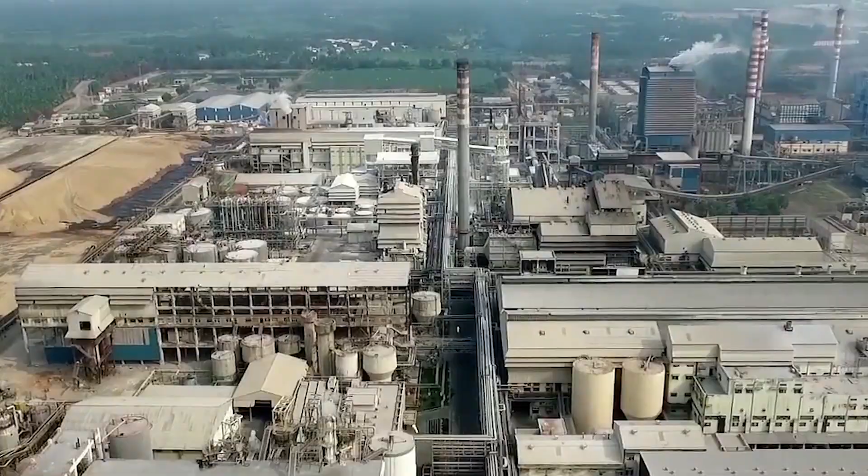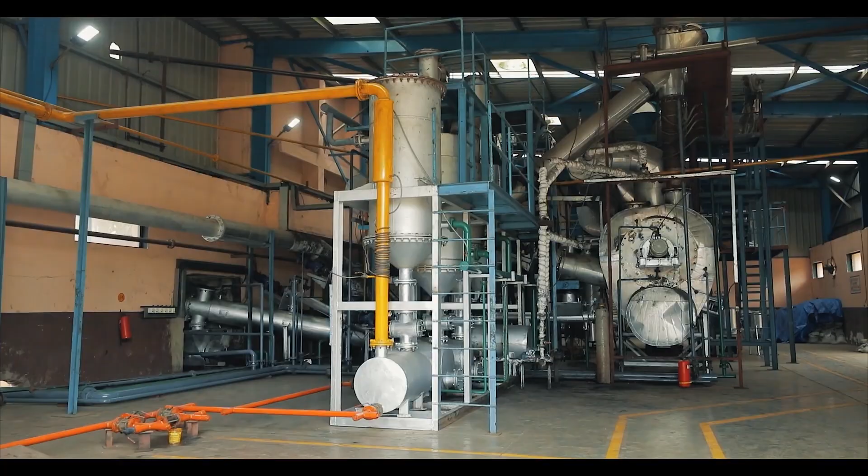Agan Pyrolysis plant, a next-generation technology that converts plastic into valuable fuel. From 5 tons of plastic, we produce 2.5 tons of pure pyrolysis oil. No smoke, no residue. Waste becomes wealth. This is not just recycling. This is a global-grade fuel reshaping the energy market.

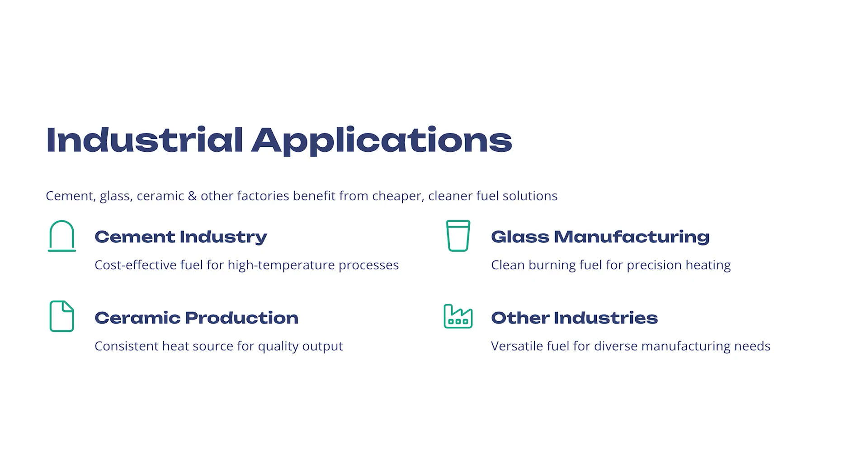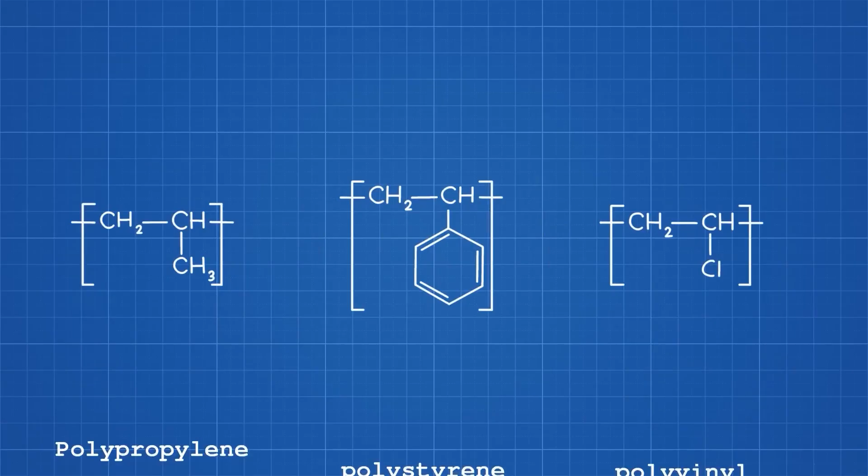But why is pyrolysis oil so significant? Because it's a clean and sustainable alternative to fossil fuel. For industries like cement, textiles, and paper, it's cheaper, cleaner, and far more sustainable. Plastics are inexpensive and durable. That's why their production has grown rapidly around the world. But because of their chemical structure and resistance to natural decay, they take hundreds of years to degrade. That's what makes plastic pollution a global crisis.

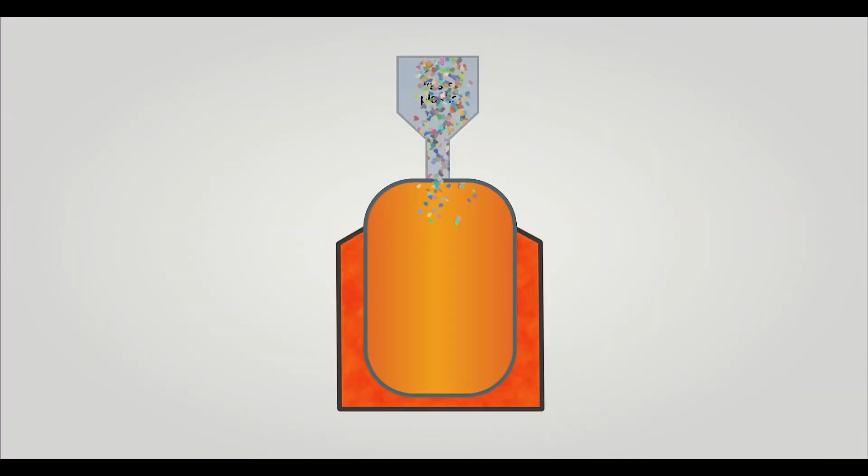In a world drowning in plastic waste, it's now being transformed into a valuable resource, reused across industries through a process called chemical recycling. Plastic, by nature, is made from crude oil. But through a reverse process known as pyrolysis, it can be converted back into its original form. Plastic pyrolysis is a process where plastics are heated at high temperatures without oxygen, breaking them down into reusable fuel, a highly advanced recycling technology. The word pyro means heat, and lysis means breakdown, together meaning breakdown by heat.

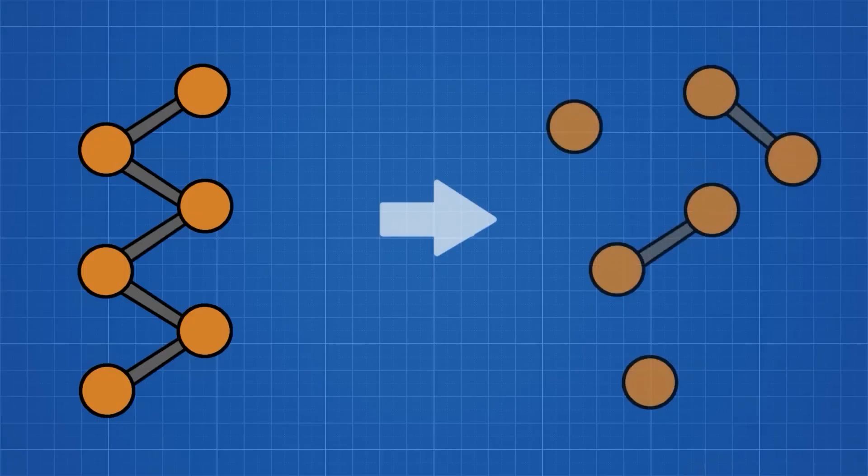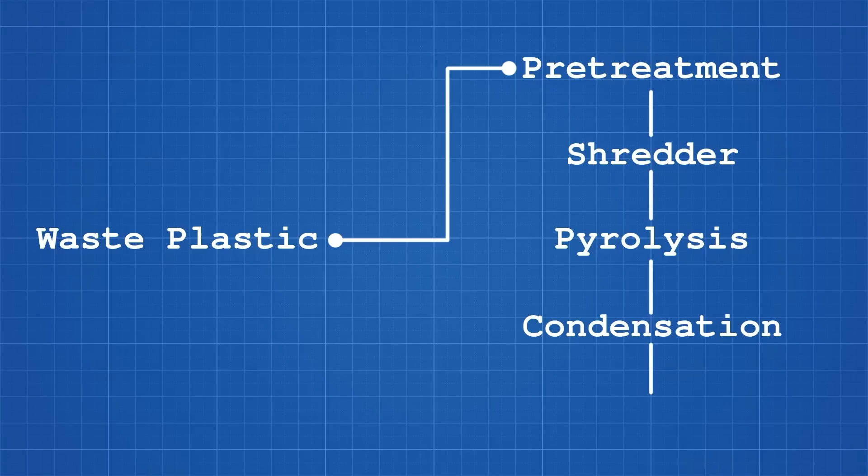The plastic pyrolysis process has 5 key stages: 1. Waste plastic. 2. Pretreatment. 3. Shredding. 4. Pyrolysis. 5. Condensation and refining. First, during pretreatment, all foreign materials are removed. Next, the plastic is shredded into small pieces.

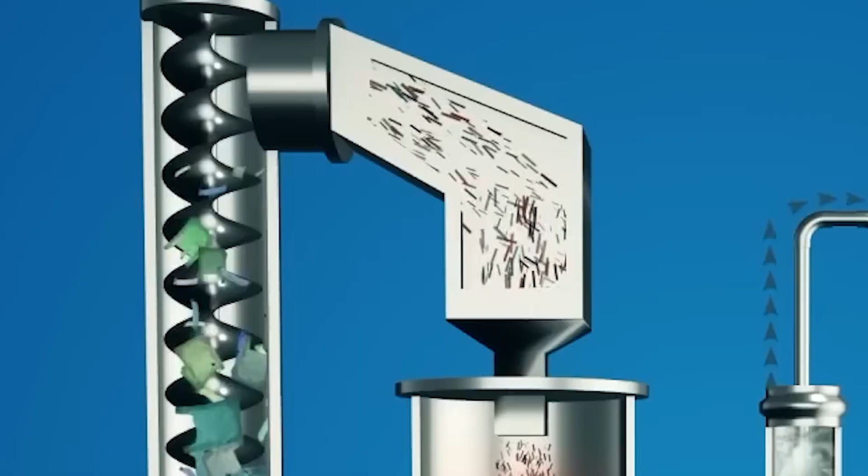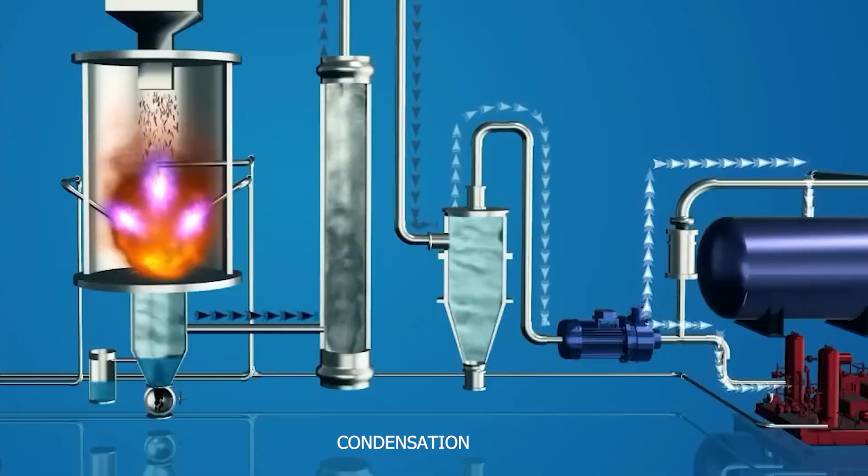Then, the shredded plastics are fed into the ASME plasma reactor. Here, in the absence of oxygen and with the help of a catalyst, plastics are heated to 450 degrees Celsius, turning into gas. This gas then passes through a condenser, where it cools and converts into liquid oil. From this process, we get 80% oil, 15% gas, and 5% carbon black.

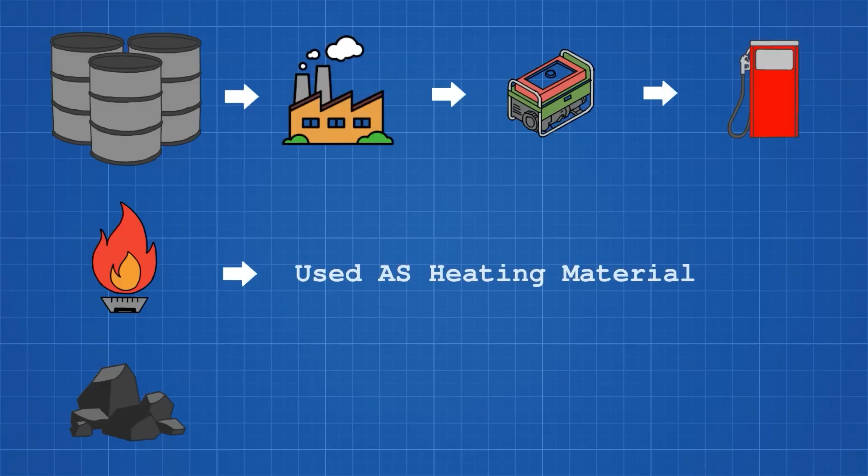80% oil, used in cement, glass, ceramic, and power industries, and can be refined into diesel for trucks, tractors, and heavy vehicles. 15% gas, recycled back into the reactor to provide heat for the process. 5% carbon black, or ash, used in construction as slag or converted into coal for industrial use.

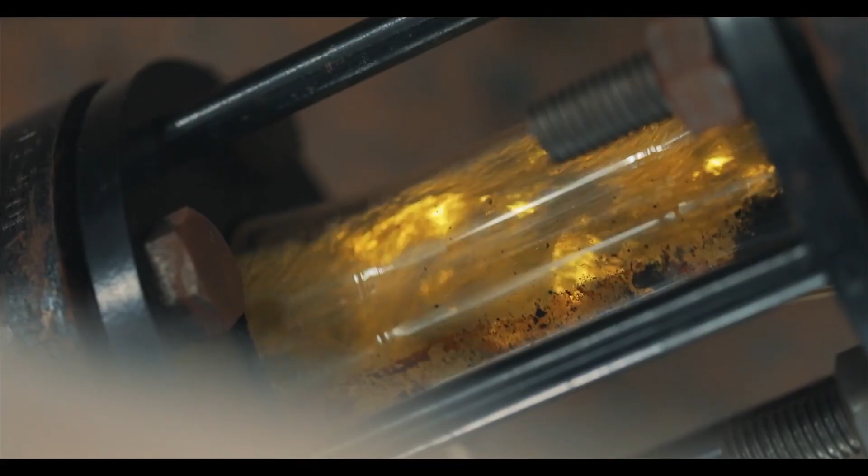All around the world, industries are still relying on traditional systems: coal burners, gas burners, rotary burners. Because of this, there are 2 major problems: high operating costs from fluctuating fuel prices and heavy maintenance, and environmental impact caused by harmful emissions. But our Agan plant is different. We use an advanced plasma reactor with a high-yield condensation system, powered entirely by electricity. Zero direct emissions, no burning, and extremely low operating cost.

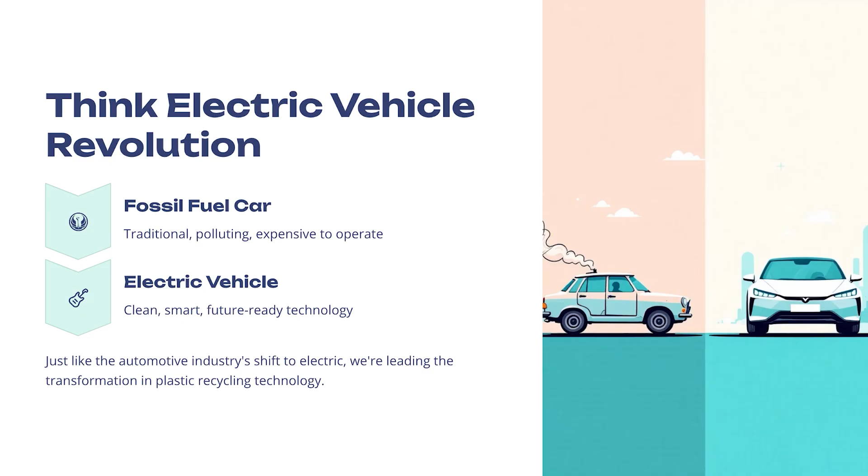To put it simply, think of it like the automotive industry's shift to electric. Cleaner, smarter, and absolutely future-ready. This is not just recycling. This is the fuel of the future. Recognized on the global stage, your investment doesn't just yield financial returns. It also helps build a sustainable future for generations to come.

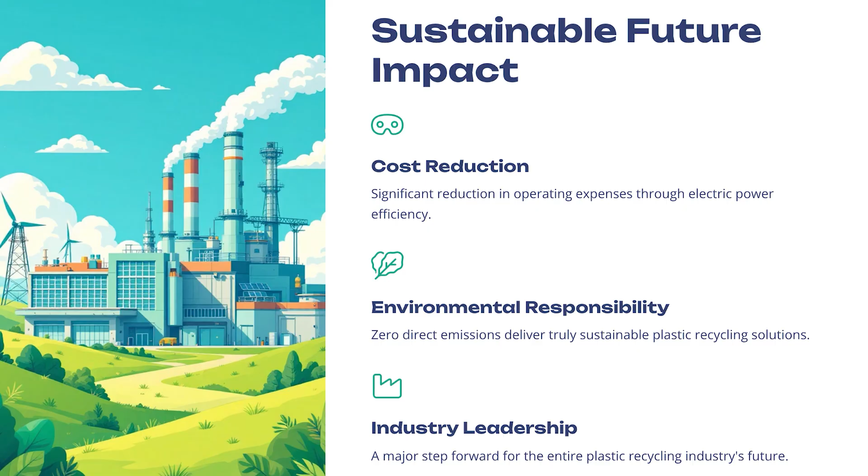The world has already begun converting waste into energy. Sweden, Singapore, Germany, they acted ahead of time. Now, it's Tamil Nadu's turn. Agan Pyrolysis is not just a plant. It's a revolution that makes history. A movement for a cleaner tomorrow.